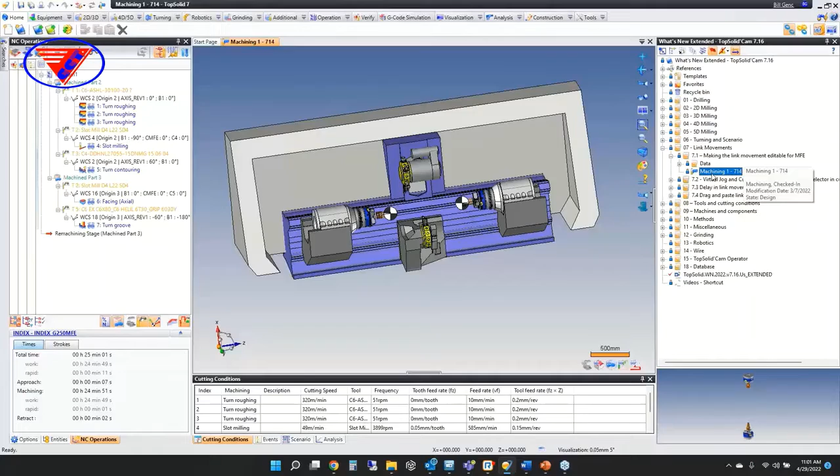All right, so let's start with some link movement improvements. This first one is really a specific improvement for a specific type of machine called an index. This machine, up here on the upper turret, is kind of unique in that it has a milling head as well as a standard turret. You can obviously rotate this, index it and whatnot. But what you actually have is a tool holder that has multiple tools, and this is tool changeable.

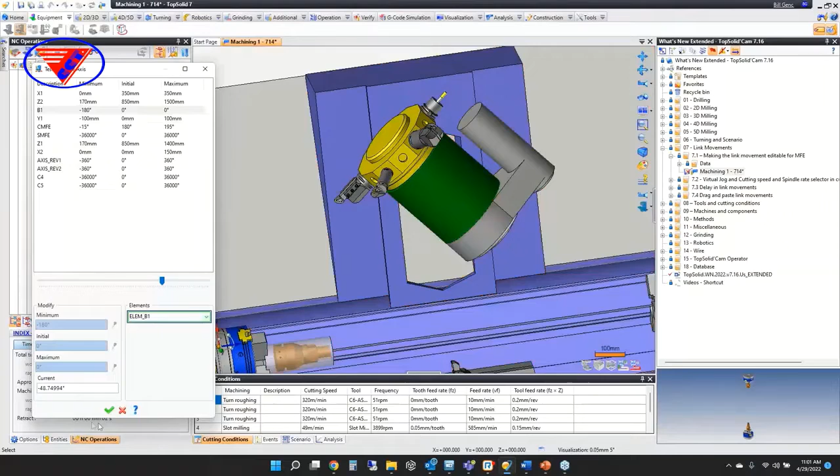What happened is on the link movements, it became difficult to manage what the correct tool change position was. So the improvement this year is to manage conditions like this better, so that it pays attention specifically to the tool holder and calls the correct tool change position. There's really not much to show you as much as it is to tell you that these machines are just supported better now.

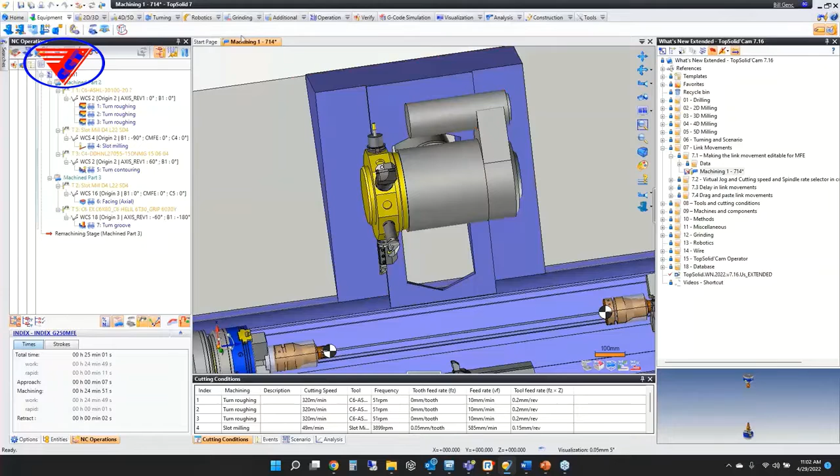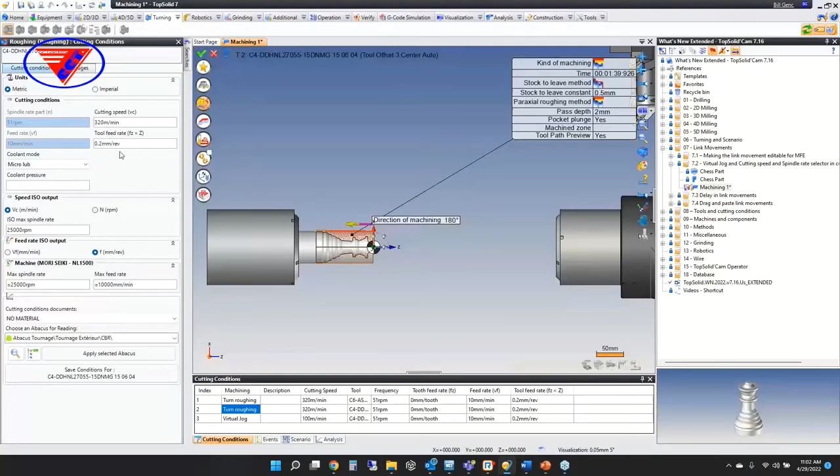Next, in all virtual jog movements and link movements, the feed rates now display in the same unit as the one chosen in the cutting conditions panel. What do I mean? If I go to my roughing here, and I go to my cutting conditions panel, you can see here we're in metric, right? Meters per minute, millimeters per rev, and so forth. And if we go into the link movement...

Where are we at right here? Millimeters per rev. So we had a little oversight on our side where it didn't pay attention to the units being called there, and sometimes there was confusion in the custom feed rates. So that's been improved upon as well.

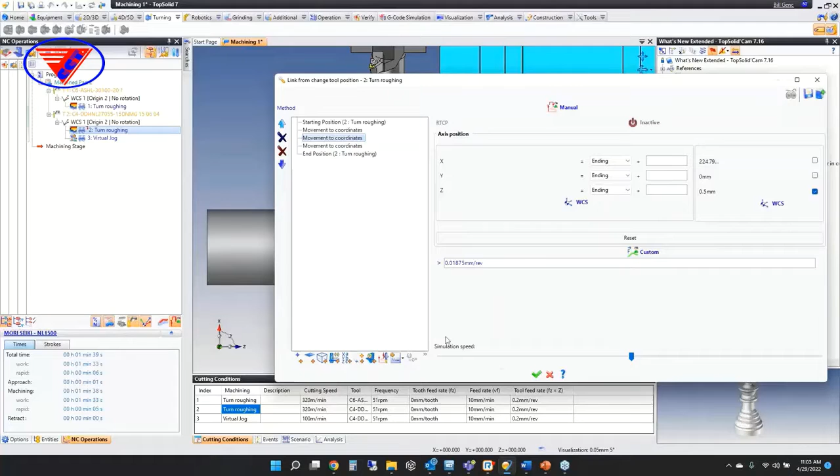Moving right along. I suppose I could have done it right there, but I'm going to do it in this one anyway. We've also added within link movements, just go ahead and edit the approach. You now have the ability to add a delay, based on time or revolution count. It's accessible right here. You can now add a dwell all you want within your link movements.

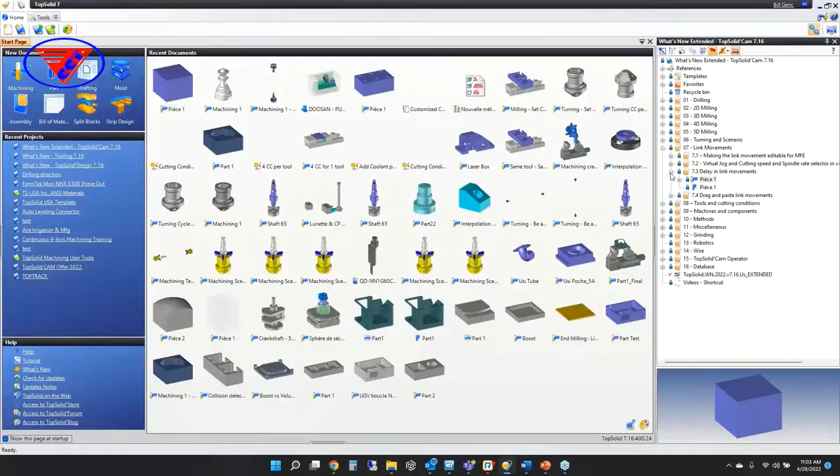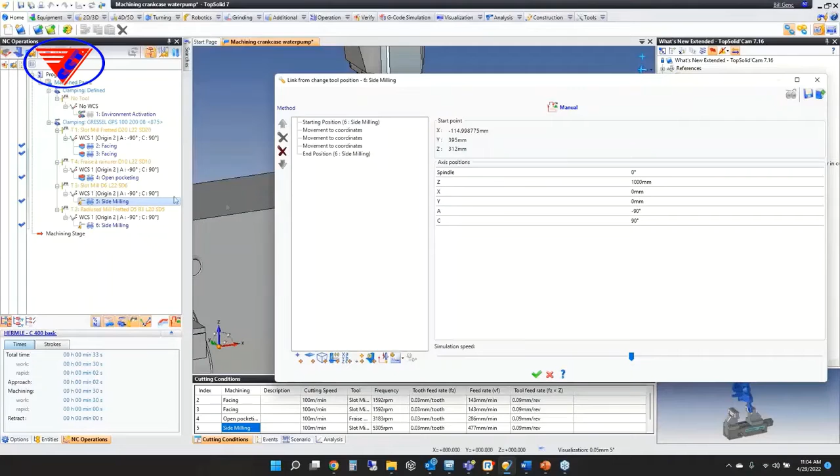And then finally, drag and drop link movements. This one's actually kind of cool. So you have operations that you're doing, right? And maybe you want to edit the approach on this one. So let's go to our link movement here, and we want to use the same approach that we used on this toolpath. You can literally just left click and hold, drag and drop it to here, and it copies all the same exact link movements from this one, switches you to manual, off you go. Just another example of TopSolid making things a little bit easier, a little bit more efficient for you.

Cool. All right, that's it for link movements. Next, we're going to move on to cutting conditions. So, let me get to my notes here.

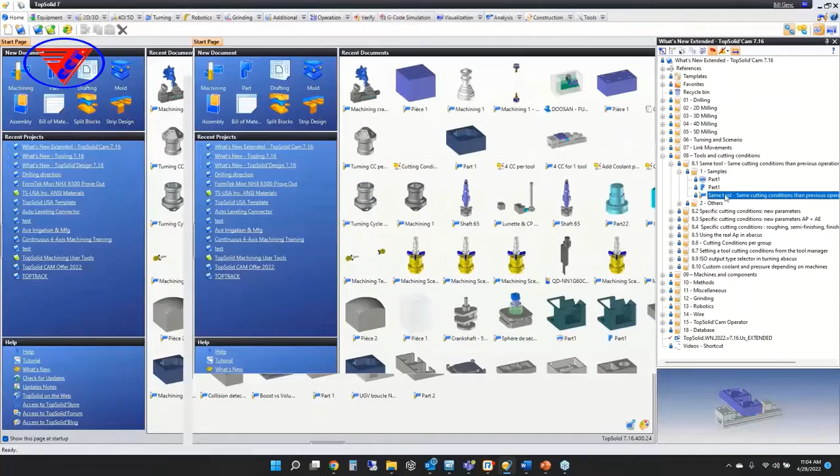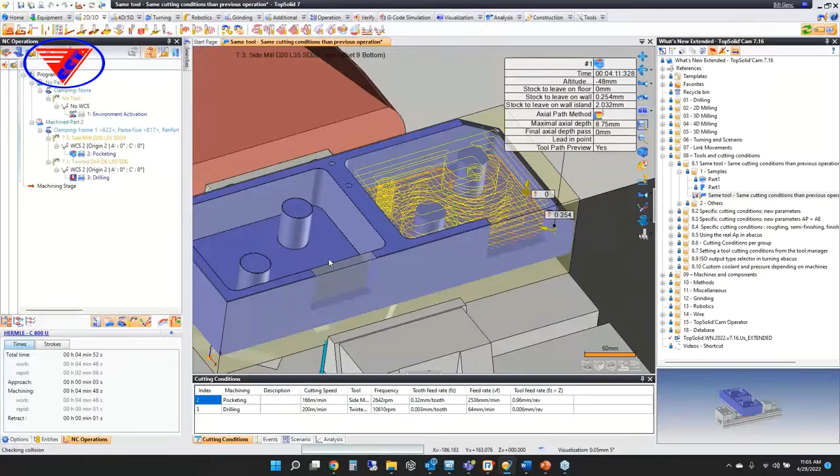This one is just a minor one, but it's a nice one. So if we look right now at our cutting conditions for pocketing, our cutting speed is 166 meters per minute, we're at 0.32 millimeter per tooth. If I go and create another tool path here, using that same tool, it's now going to automatically use the same cutting conditions.

The only restriction to this, where it won't use the same cutting conditions, is if those cutting conditions are being supplied by an abacus or a method or a default parameter of some type, then of course it will calculate however those objects want the cutting conditions to be calculated. Otherwise, we just assume moving forward that if this tool has been used somewhere in this program and you're calling it again, that you want to use the previous cutting conditions.

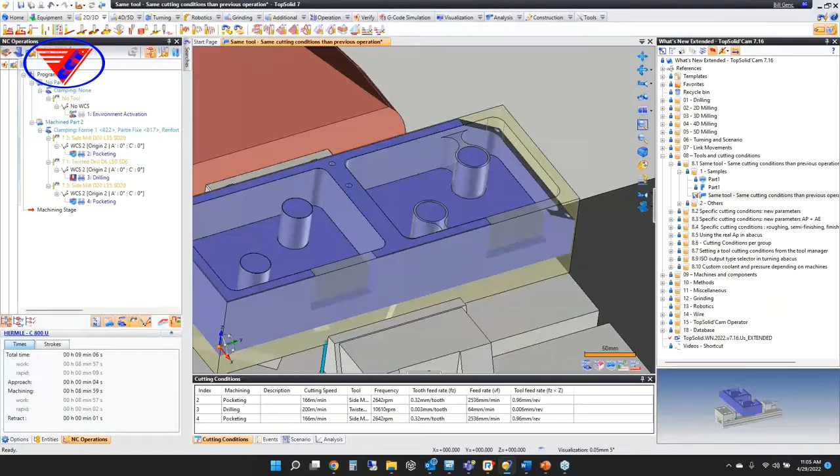All right, next. So we have some new parameters available to you within a cutting conditions abacus document. It's in the specific field here.

First and foremost, now it is possible to specify your coolant pressure and to activate the tooth feed rate locked option. As well, you now have the AP and AE parameters in these specific cutting conditions, with AP being the depth of cut and AE being the radial depth of cut. So these cutting conditions can now be set specific for specific depths.

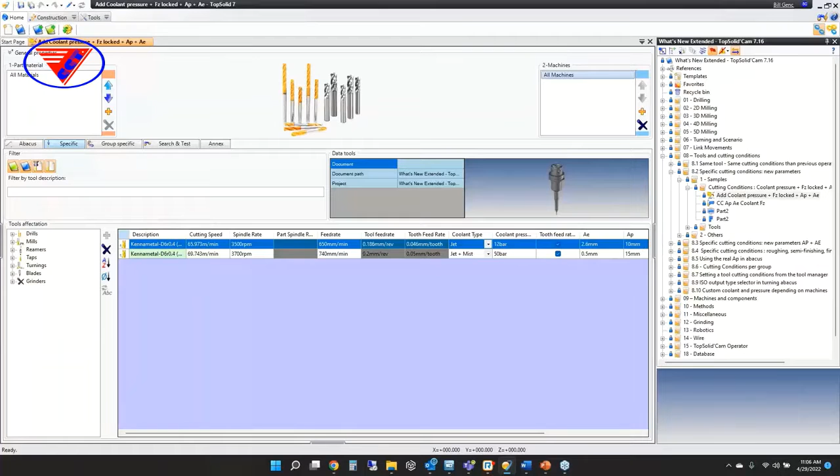From there, let's open up our laser box as well because we'll show how this works. You also have another parameter in here. Did I go to the wrong one? That's the wrong one, sorry.

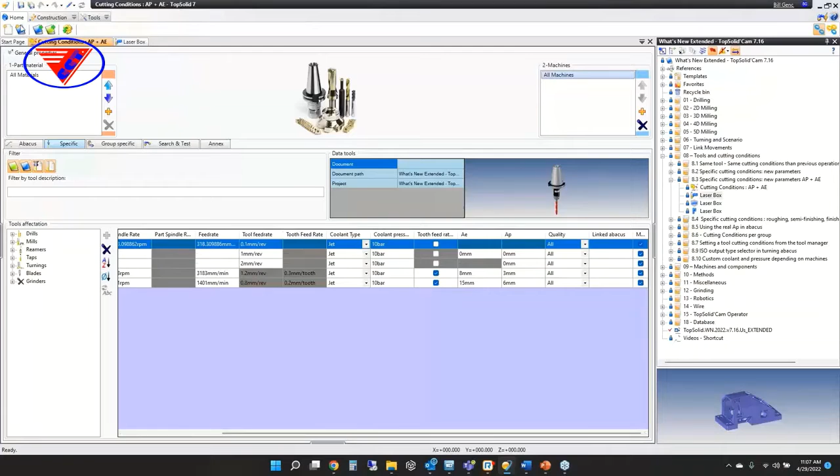You also have another new parameter in here called quality. The idea behind quality is you can have up to 4 different cutting conditions for the same tool: a roughing cutting condition, a semi-finishing, a finishing, and then just a general cutting condition.

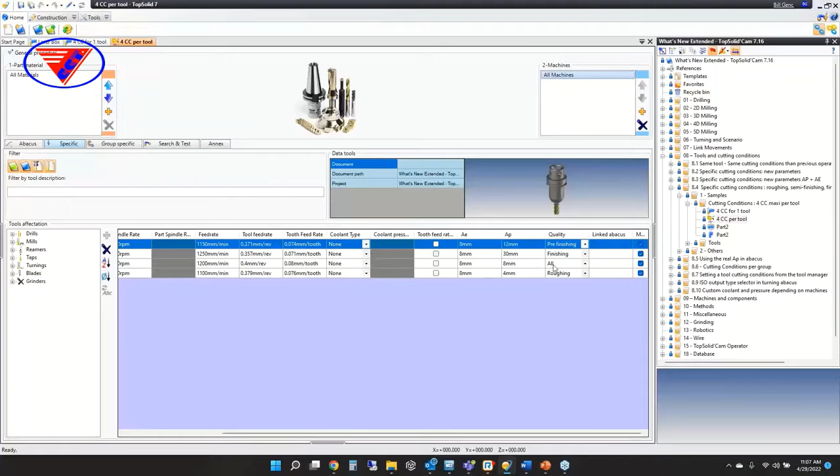So how does it work? When we go into our environment here and choose, for example, contour roughing, and go into our cutting conditions here, you have the cutting condition document being used, which is the 4 cutting conditions per tool document that I just showed you.

In here you're going to see all 4 of them. So I can say let's apply the roughing cutting conditions, and you can see now we're set to roughing. Or let's do the pre-finishing, apply, now we're at our pre-finishing. So at the end of the day, you have the ability to have 4 different cutting conditions per tool now.

The question is whether AE and AP auto-populate on the procedure. With the depth of cut, the radial and axial depth of cut, the way it works is that is the target axial depth of cut, target radial depth of cut, and the cutting condition will interpolate based on the depth of cut that you've chosen. So it's a starting point.

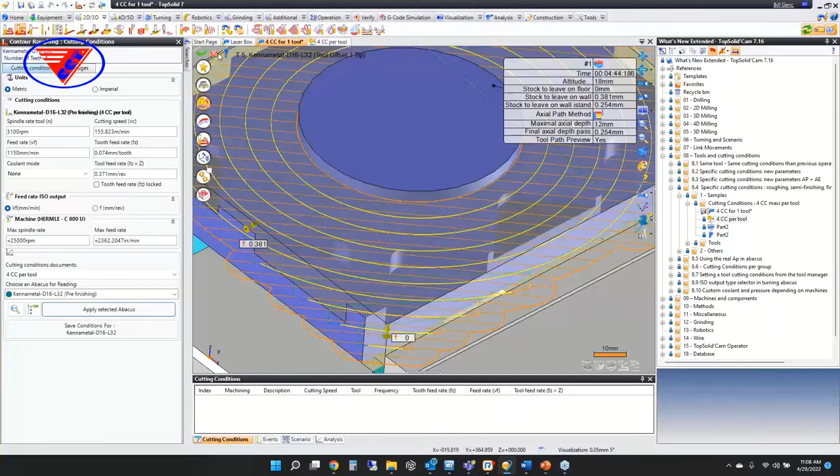Think of it as a baby abacus. Alright, let's keep going. Close all this stuff down.

Take into account the real AP. At the end of the day, actually it's easier to show here this way. I should mention, if you set AE and AP to 0, putting 0 in these parameters will ignore the parameters. So if you enter 0 here, then it just uses the rest of your cutting conditions and ignores the calculation done on those.

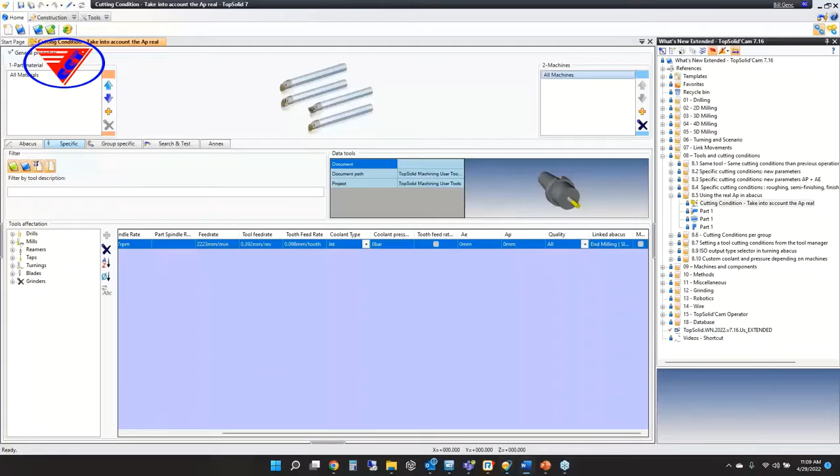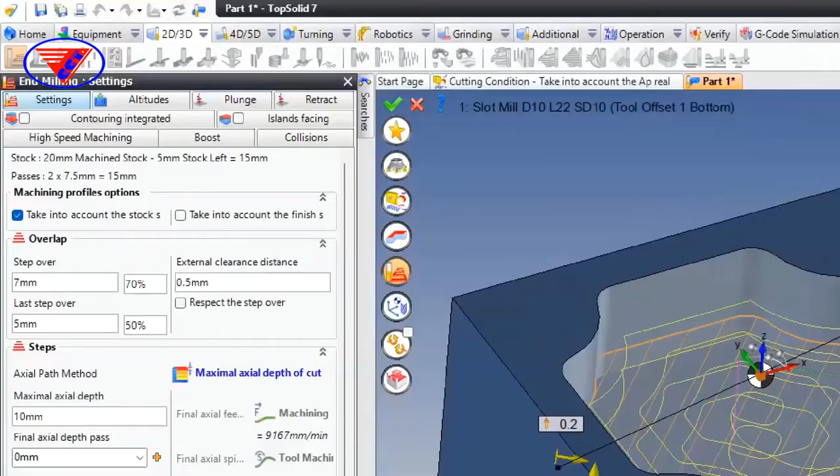On this next option, called using the real AP in the abacus, what's important is this: it used to be that the AP was calculated based on this right here. But if I set this to 10 millimeters, for example, based on the depth of cut, my real AP value is this. And so now the cutting conditions will actually look at this value here, the actual depth of cut, to calculate the cutting condition for you.

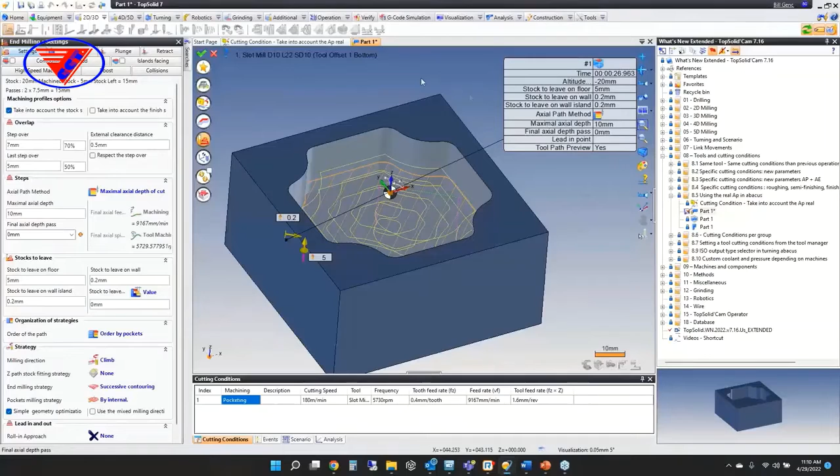Okay, now keep it going. This one I think is kind of interesting.

This is a new option that was added to our cutting conditions. We now have cutting conditions groups. The groups are to allow you to assign similar cutting conditions, or the same cutting conditions, I should say, to a specific group of tools.

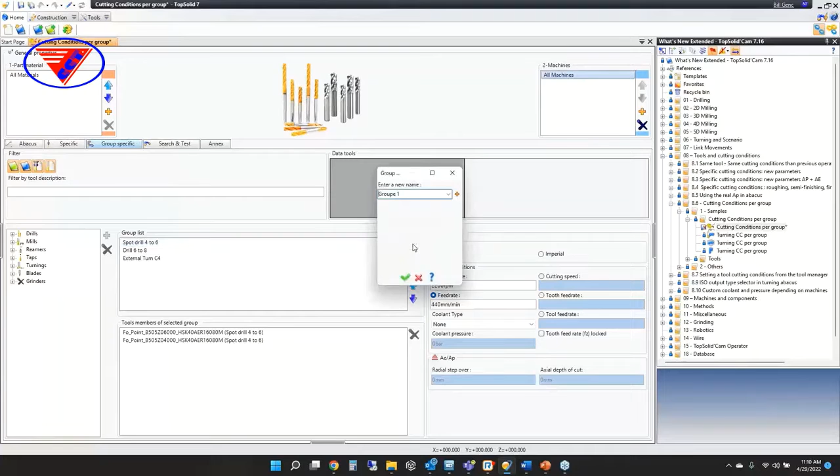So you start by creating a group. We'll call this TopSolid USA. Now that we have TopSolid USA, I can come in here and find whatever tools I want to add to it. I can add, let's say, I want to find something useful. Here we go, we'll add this one, and we'll add this one.

Now that I have those added to my TopSolid USA group, I can come over here and set exactly metric or imperial, whatever. I want this to be 5,000 RPM. I want this to be 750 millimeters per minute. I want this to be jet coolant. I want my AE to be 3 and my axial depth of cut to be 5.

Oops, I'm in inches, that's weird. Millimeters. Alright, now we set these groups. So how do they work?

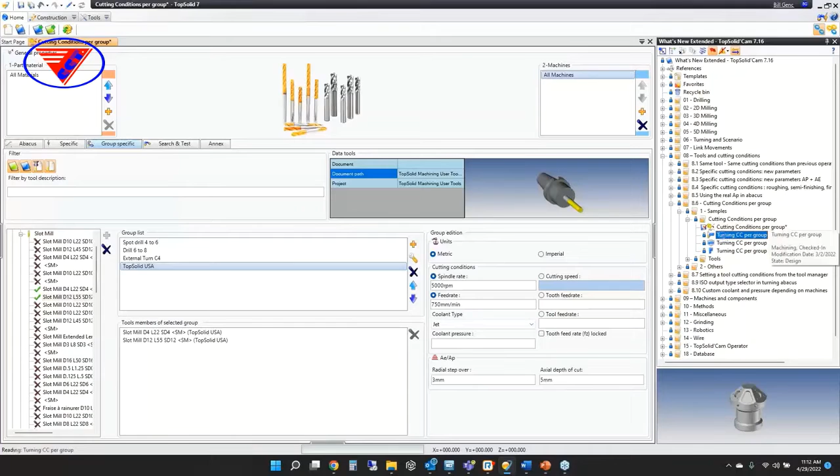Then when we go into the actual document, let's say we go to our drilling here, you have the cutting conditions per group, and it's just pulling it directly out of that. So this is for drill 6 to 8, that was the name of it, and it's going to use the identical cutting conditions for those tools. So it's a way to simplify and speed up the creation of your cutting conditions.

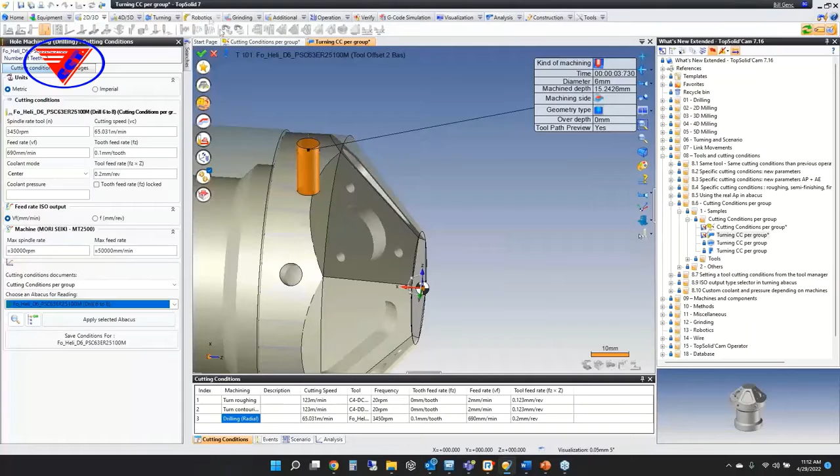Alright, let's keep going. All right, so this next one is pretty interesting.

You can now set cutting conditions down to the right place here. Yes, you can set cutting conditions, and let's call it local cutting conditions, directly from the tool manager.

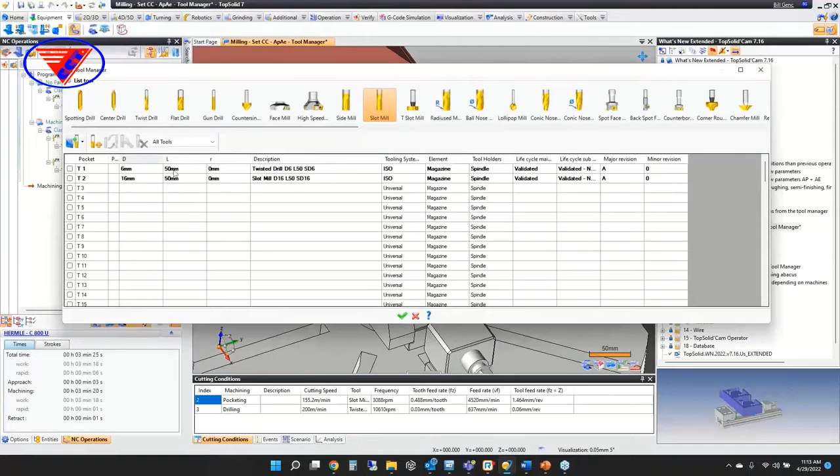For example, make sure I didn't save it this way. I didn't, perfect. If I go to my equipment tab and go to my tool manager, I can go to my twist drill, right click, and go to specific cutting conditions. Now when I do this, this dialog box will appear and I can type in what I want.

I want this to be 5,000 RPM. I want this to be 300 millimeters per minute. I want this to be mist, okay?

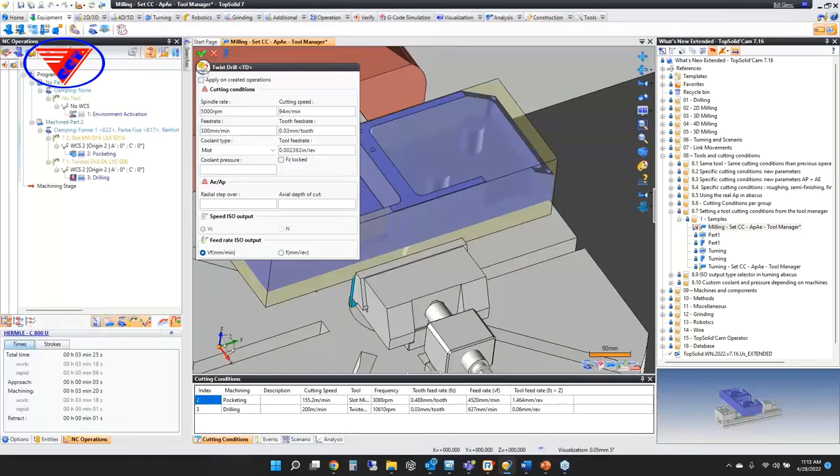And whatever. Now, if I hit apply here, it's going to apply that cutting condition everywhere that tool is used in this document. I can also just green check it. Either way, when you green check it, it creates a new folder in your entities manager called cutting conditions, and it's twist drill diameter 6 - just the name of the tool.

To apply that cutting condition, we go into drilling, then cutting conditions, and we search for the name of the cam file. In this case, it's milling-set CC APAE tool manager, and now there's your cutting condition.

There's a couple of different ways to work with cutting conditions in TopSolid. We're just trying to give you multiple ways to do things. Why would you have local cutting conditions? Maybe you want them in a specific template for a specific type of work that only affects one customer or one job, so why build dedicated libraries for all of that?

Okay, perfect. Let's keep on going.

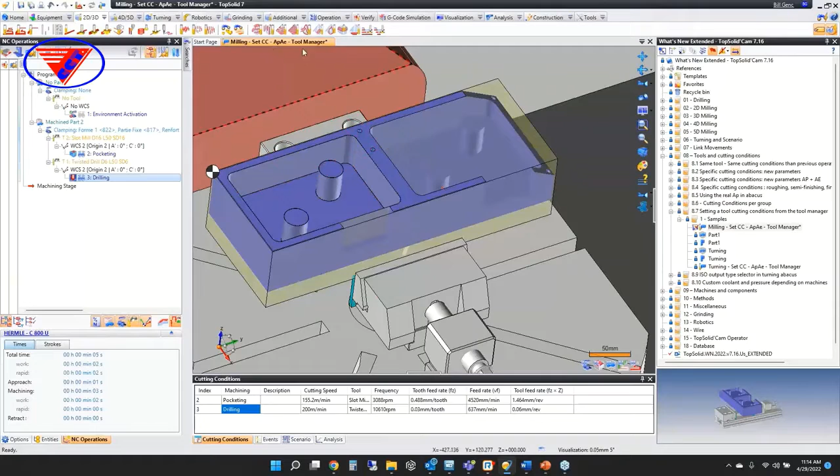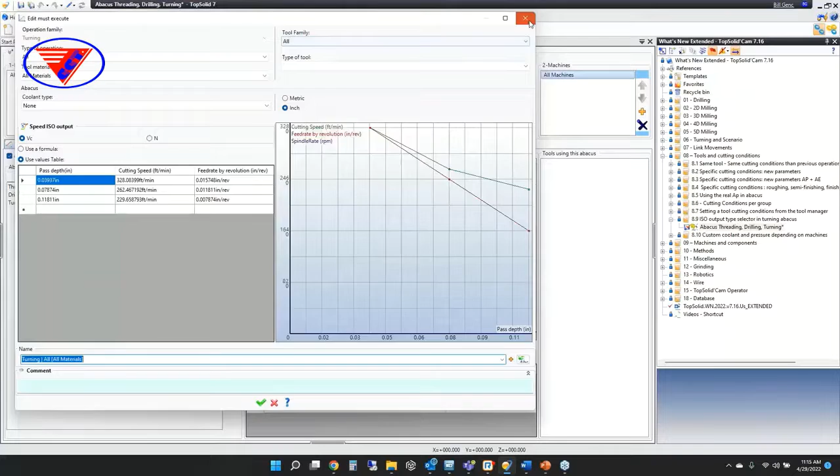This next one is a wonderful one. It is now possible in abacus to output or select surface footage calculations for turning tools, drills - there's 3 of them: drilling, threading, and turning. So now you can actually create cutting conditions for those types of tools to be used inside of TopSolid. And finally, this one, I'm going to give you the end result of it.

We have a new document type called Customize Coolants and Pressures. The whole idea here is to give us and you better control over different types of coolants. I'm going to show you this at the end. Some of you guys have machines where the cutting conditions, especially for coolants, can get quite detailed, especially if you can control pressure with different options. So now the coolant document, based on the type of coolant you choose, will automatically build additional entries for you in the dialog box.

These entries then will be mapped into the post processor. Depending on what it is, it could be a drop-down menu full of options - it just depends on what you're trying to do. You can have them called whatever you want, named however you want, so you can match up precisely to the way your machines work.

Now, this document is open to users. However, it does require that it's hooked up properly in your post processor. So if you have machines with a bunch of crazy coolant options with sub-control options, you need to reach out to us so we can discuss how to get those implemented using this new technology. If you're happy with the way the posts are already implemented, great - there's nothing to do. It's up to you.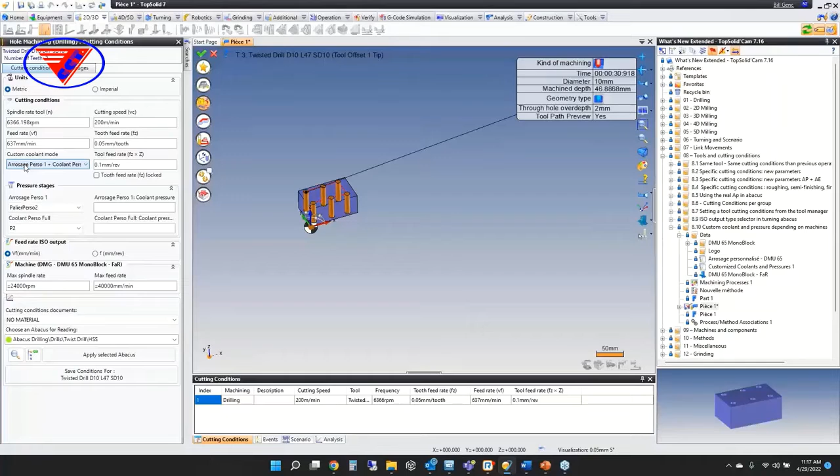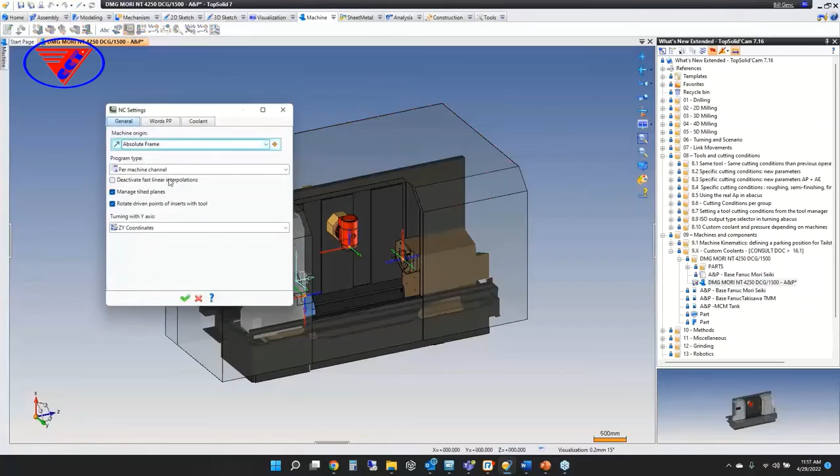The coolants also require - I'm going to hop ahead into this one - it does require us to also modify your machine definition, which I'll show you. Here it is. We specify which coolant document you want to use. Now, again, it still has to be hooked up in the post as well, so it's best to reach out to us.

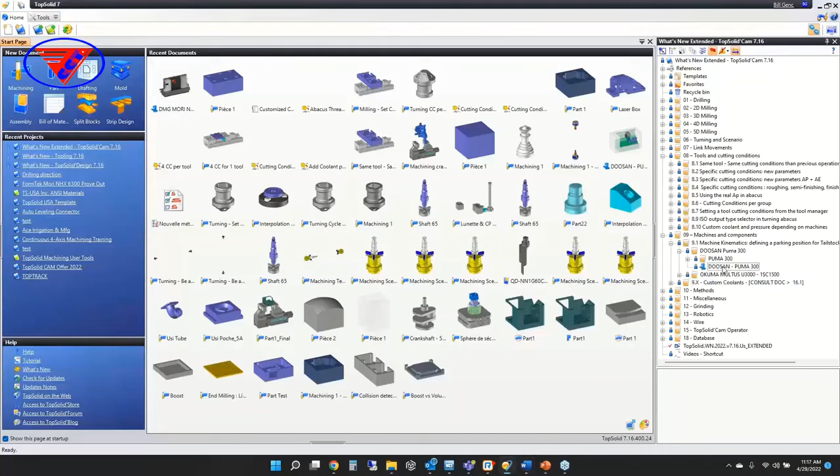The final improvement, since we're on to that next section now - the final improvement is on the machine definitions themselves. We've now made it possible to define in the machine definition a parking position for tailstocks and steadies. If you've ever made a machine definition, this will seem familiar. If not, and you have us do it for you, reach out to us and we'll take care of it. So you have something called a tool change position - this tells the software where to return something to. So I want to set where my steady returns to.

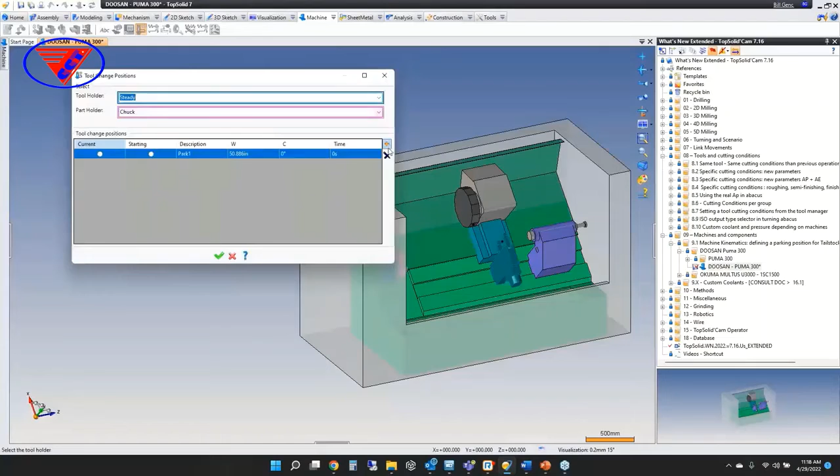I can hit plus, call this Park 1, and leave this just in that position. Then I can say this is my current and starting, that's how I want to default. And then Park 2, for example, maybe it takes 3 seconds, and my W, let's say we want this to be 110. That is the park position underneath there, C of 0.

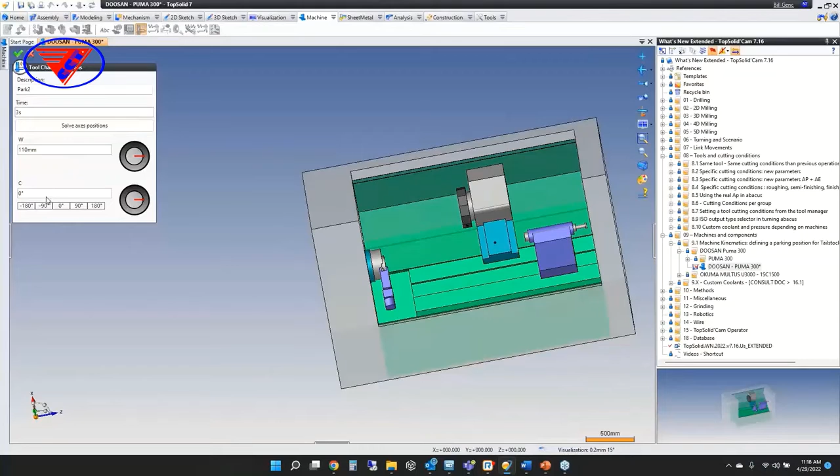So now we have 2 positions that are easily accessible to use within a link movement. Same thing for a tailstock. This should make working with these types of components significantly simpler. In years past, in order to park these, you went to a virtual jog. Now you don't have to use the virtual jog - you can do it directly in the link movement of the operation itself.

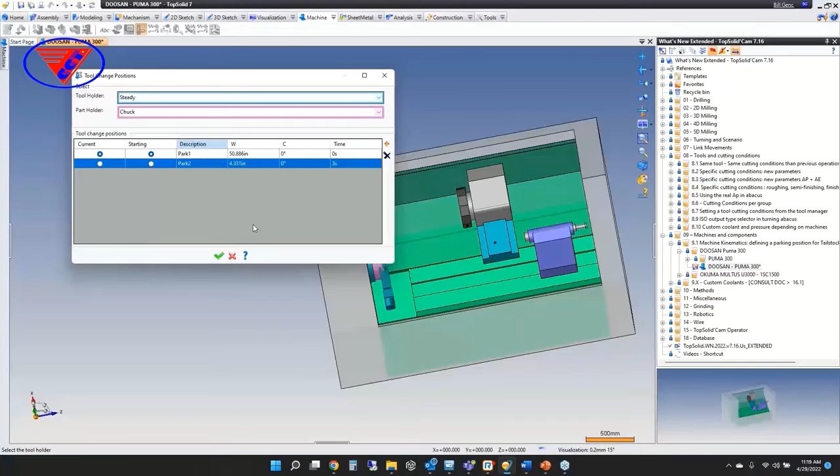Okay, cool. All right, I believe that's it for this webinar. We covered link movements, tools, and machines and components. I'm going to go back to my presentation here, make it official.